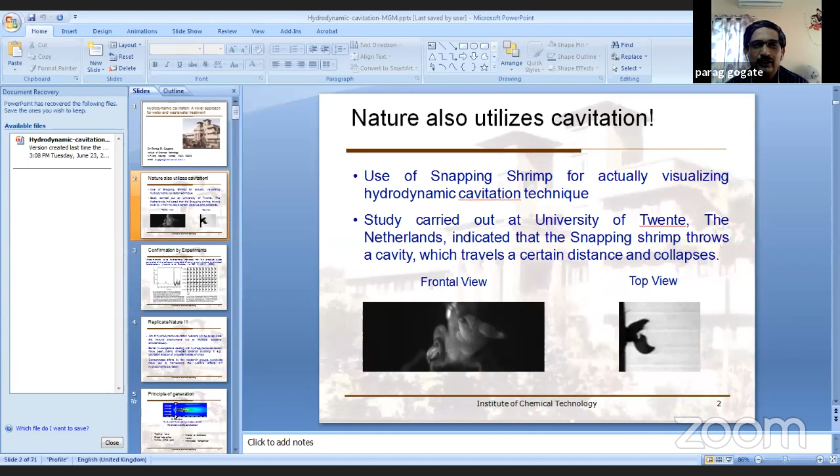Okay, thank you Dr. Kolhe for a bit of a lengthy introduction. I had sent it to you thinking you would print some online brochure or something; for the formal introduction it would have been shorter. But anyway, thanks very much. I would like to thank MGM for inviting me to deliver this lecture as a resource person. What I'll do is turn off the video so it saves some bandwidth for me, and of course the lecture will continue. So today I'm going to talk on hydrodynamic cavitation, a novel approach for water and wastewater treatment.

So when we look at cavitation, it is mostly taken in a negative manner, because what we have heard most of the time is to avoid cavitation, especially in the area of fluid dynamics, because cavitation in pumps, as all of you would understand, is a detrimental phenomenon that leads to erosion and needs to be avoided.

But hydrodynamic cavitation, if you tailor it and focus it towards the application without really affecting the reactor, it can do some wonders.

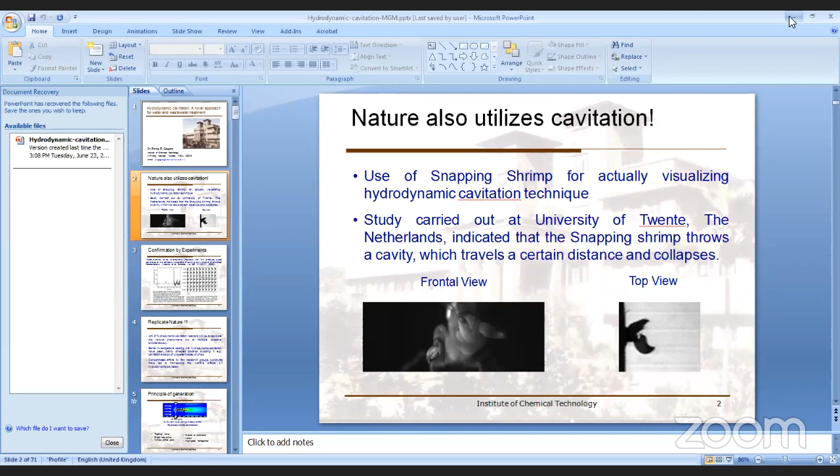Right, so let's continue.

So if you look at nature, that is also utilizing cavitation. This is a very classical old movie, but still it makes a very interesting depiction. This is a snapping shrimp, which was captured in University of Twente, Netherlands.

They are showing that even the snapping shrimp is generating a cavity which travels a certain distance and then collapses. The things would be very clear in the top view. Here you are clearly seeing that something is released, it travels a certain distance and collapses.

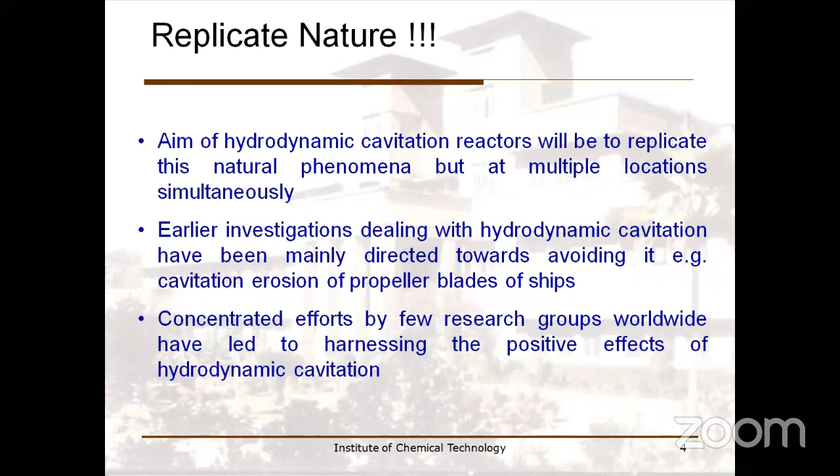Remember, propellers on warships rotate at a significantly higher speed, so that also is going to generate cavitation. And because the cavities were collapsing near the blades, it was also leading to erosion. Concentrated efforts by a few research groups worldwide have now led to harnessing the positive effects of hydrodynamic cavitation.

Let's see how we are going to generate cavitation. So imagine a pipe flow and you have an orifice right at the center. What is going to happen is, because of Bernoulli's principle, once the liquid is passing through the constriction, the velocity is going to go up because the area is significantly reducing.

So once the velocity increases, your pressure is going to go down significantly, and if it falls below the vapor pressure, you will generate a cavity.

These generated cavities are going to travel downstream of the orifice, and then undergo pressure fluctuations. There will be eddies generated, which will drive the different stages of cavitation. So definitely you are going to get significant effects downstream of the orifice, and this relates to whatever cavitation effects you are going to generate.

Now, orifice plate is only one example of the cavitation device. You can also have a throttling valve, or a venturi, which can be either circular or a slit-type venturi, which we describe as non-circular. It can also be a high-speed homogenizer, which will have impellers or stators and rotors rotating at significantly higher speeds.

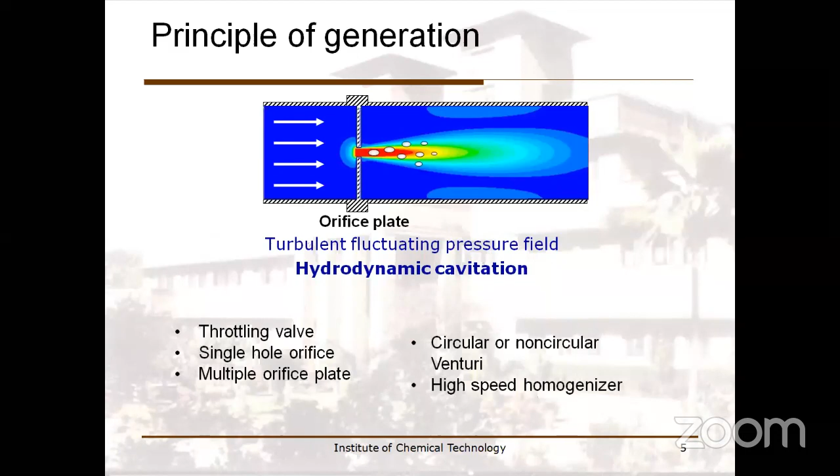And in orifice, you can also have either a single hole orifice, or multiple orifice plates which can be inserted as a cavitation device. So what is going to happen is you will have a cavity being generated in the system, and then it's going to collapse.

So there are three different zones which happen in cavitation effect. One, you are going to generate nuclei, which is going to grow to a certain size, and then it's going to collapse. On the screen, you can see time on x-axis, radius on y-axis, and you can clearly see there are two profiles which are possible.

One we call steady cavitation, second we call transient cavitation. The difference is that in steady cavitation, you get multiple oscillations, and the pressure field generated is lower or of less intensity. Whereas in transient cavitation, you get a significant increase in cavity growth, and then there is a sudden collapse which gives you intense cavitation.

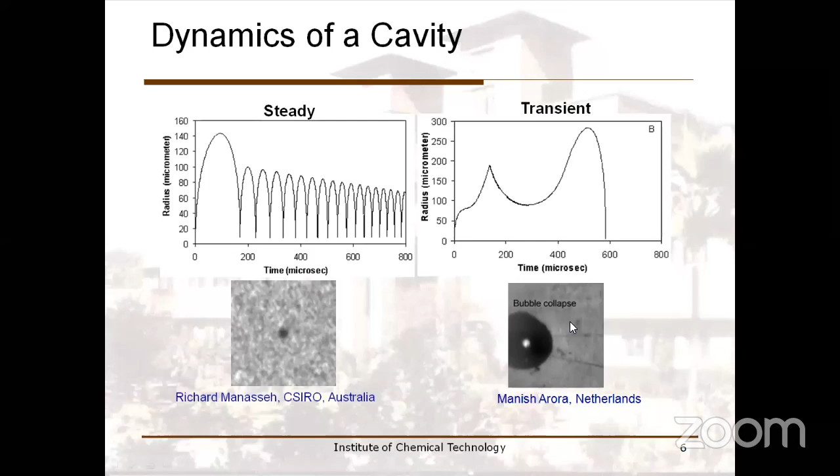People have again visualized this, and these are some videos for your own understanding. You can clearly see this is just a stable type of cavitation, whereas this is transient cavitation, and there is a large liquid circulated around the site of collapse. So the effects are much higher in the case of transient cavitation.

Now, if I want to talk about process intensification, I would look at the key aspects. One is you are going to have localized intense pressure and temperature conditions equivalent to hotspots. Imagine local pressures and temperatures to the tune of a few thousand degrees Celsius and a few hundred or sometimes even a thousand atmosphere pressures. It's not going to be over the entire reactor zone, but over the local microscopic scale.

So your overall reactor, nothing is going to happen, but whatever liquid is exposed to these particular conditions, you are going to get significant effects. And one of the effects would be generation of highly reactive free radicals.

In addition, because things are happening locally, there is also concentrated energy dissipation at the location of transformation. There is also generation of high intensity turbulence, increased transport coefficient, and if you combine everything, you can get an order of magnitude reduction in the energy requirement for physical and chemical transformation.

If you look at the highly reactive free radicals and local hotspots, these are going to intensify chemical processing applications, say reactions or wastewater treatment, whereas high intensity turbulence and increased transport coefficients are going to be significantly useful for reactions limited by mass transfer, or applications which solely depend on physical effects.

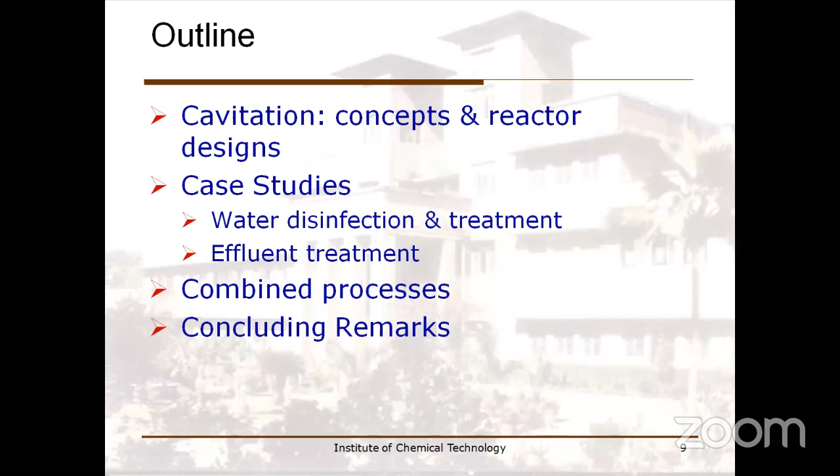So I'm just going to give an outline about the talk. I'm going to talk about cavitation concepts, which we have already seen. Some discussion will be on the possible reactor designs, which is going to be quite simple. We will see some case studies, say from water disinfection or effluent treatment, and we will also see combined processes, and then finally conclude the talk.

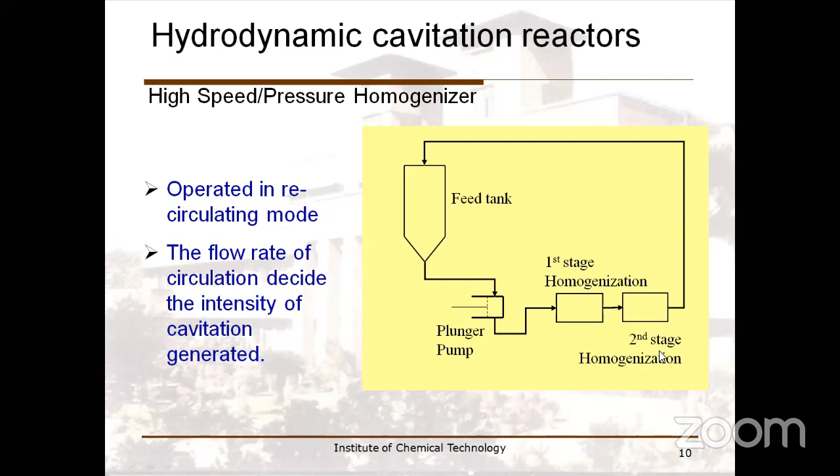This can be, or you combine it with an ultrasonic flow cell. So all variations can indeed be possible.

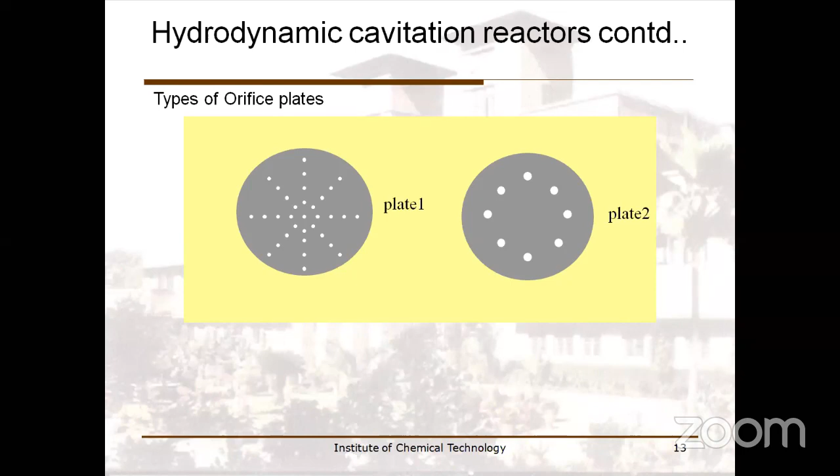So again, there is some depiction in terms of what type of different holes you can use on the plates. And remember, these holes are mostly circular, because it's going to be very easy to drill a circular hole on the plate. But if you can, you can also get triangular or square type holes, because that is going to change your perimeter to cross-sectional area parameters, and this is going to affect your cavitational intensity. So definitely that's going to be very important.

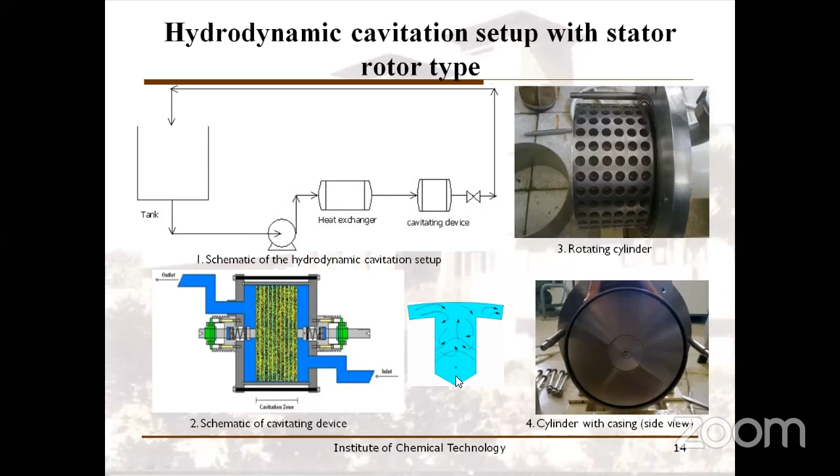So this is a typical stator rotor type assembly, and you can see clearly this rotating cylinder is having multiple holes, which allows you to have a fluid interaction. This schematically shows how you are going to get interactions and then the cavitation phenomena. So again, it's kind of a flow loop.

Now, if you want to understand cavitation in depth, you need to also look at the theoretical aspects, because you need to look at the hydrodynamic cavitation modeling. Now, people don't really want to spend time on modeling, rather spend a lot of intellectual energy on modeling, as compared to that, doing experiments is going to be simpler. But definitely, if you are keen on modeling, you can definitely understand the phenomena fundamentally or in depth.

So I'm going to just present some slides even on modeling. That should not scare some of you, but I'm going to keep it simple, not going to talk about detailed solutions.

Let's try to understand this in simple words. When I look at the bubble dynamics approach, there are two common approaches which are used. One is a simple single cavity approach, and second is a bit complicated cluster approach.

A simile of this single cavity approach and cluster approach lies in sedimentation, which is a simple chemical engineering operation. You must have heard about free settling and hindered settling. In free settling, you have one particle falling in a pool of liquid. In hindered settling, there are too many particles which are going to fall down in a small pool of liquid, so each particle is affecting the motion of other particles.

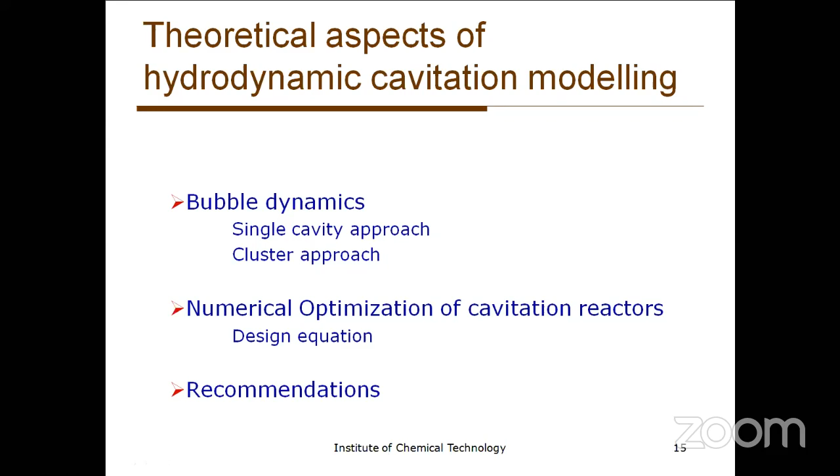Let's see now some theoretical understanding. There is a cavitation number which allows you to predict whether cavitation is going to be possible. It's a simple ratio of pressure drop per unit kinetic energy. Ideally, when the cavitation number is less than 1, cavitation happens.

It can happen sometimes when the cavitation number is greater than 1, particularly if you're having dissolved gases or impurities in the system. But for maximum benefits, one should maintain CV less than 1. Typical range would be around 0.2 to 0.4, or in that range, which will give you maximum benefits.

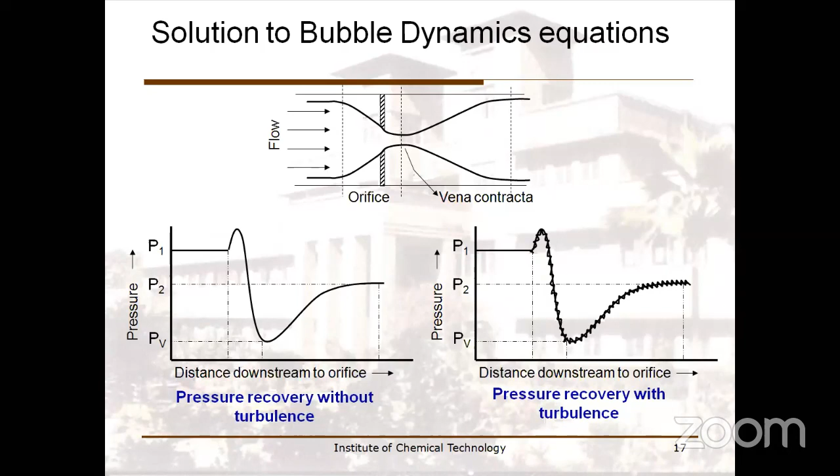For a simple solution to bubble dynamics equations, you will again have flow through the orifice. You know that there will be a vena contracta which will be generated, then there will be pressure recovery without turbulence, and pressure recovery with turbulence. This is very similar to your stable cavitation and transient cavitation.

You have different equations, so I'm not going to go into details. I already shared the presentation, but I'm just highlighting the approach to be followed.

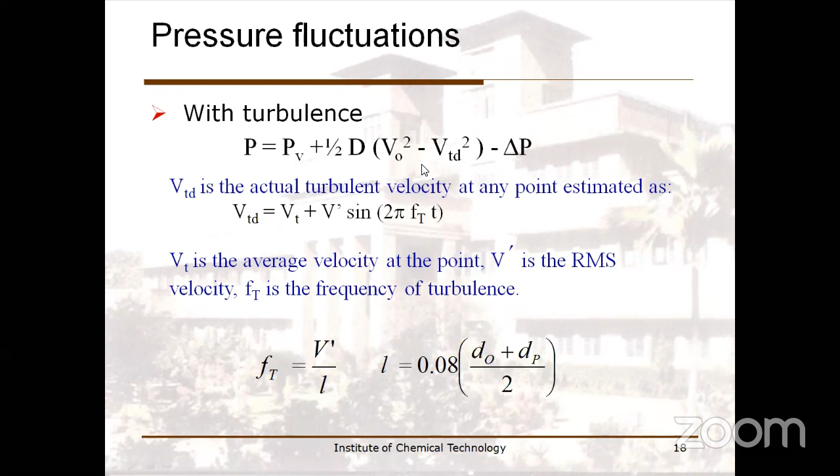With turbulence, you have the sinusoidal frequency of turbulence, which considers your turbulent velocity. And L is the Prandtl length scale of eddy, which is based on your orifice diameter and pipe diameter. So based on the geometry, you calculate the length scale, calculate the frequency of turbulence, and then use it to calculate the turbulent velocity, and then use it in the actual pressure drop equations, which will be used in your bubble dynamics equation.

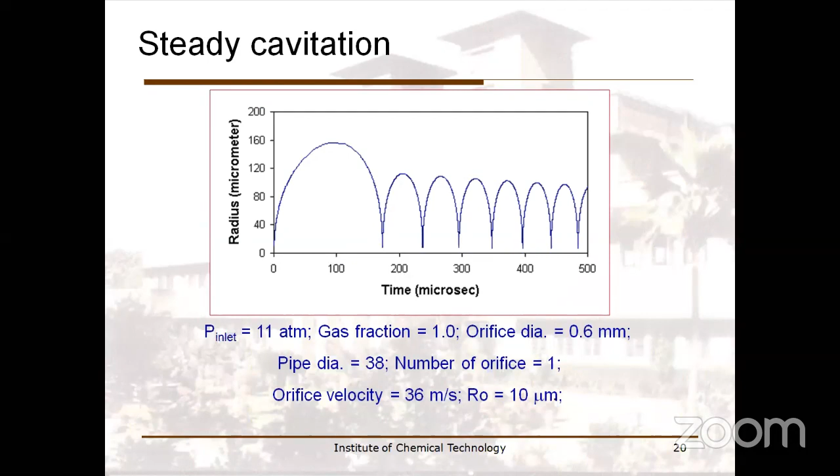Stable cavitation again is similar to what we have seen earlier, there are a lot of fluctuations, and in transient cavitation, you are going to just get a maximum and then significant collapse. The idea of showing these conditions here is that depending on the conditions, you can generate either the steady cavitation or the transient cavitation.

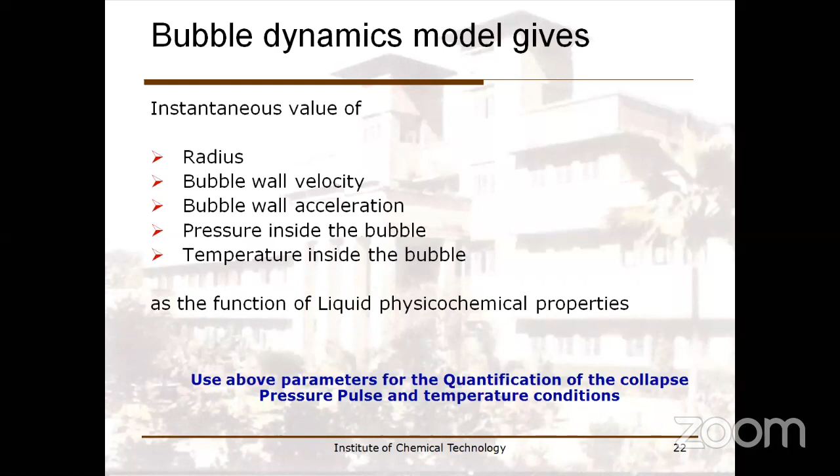A typical bubble dynamic simulation will give you instantaneous values of all these parameters and the liquid physicochemical properties, which can be used for the quantification of collapse pressure pulse and the temperature conditions, which can then be used to relate to your kinetic condition. So let's look at some of the optimum recommendations for the liquid phase physicochemical properties. Liquid vapor pressure, viscosity, and surface tension are the key parameters which are responsible for controlling the intensity of cavitation.

Viscosity in particular, if the viscosity is high, then you might have no cavitation in the system. So the favorable conditions are liquids with low vapor pressure, low viscosity, low surface tension, and the most available fluid satisfying these requirements is water. So definitely there would be many applications of cavitation because water is going to be easily available.

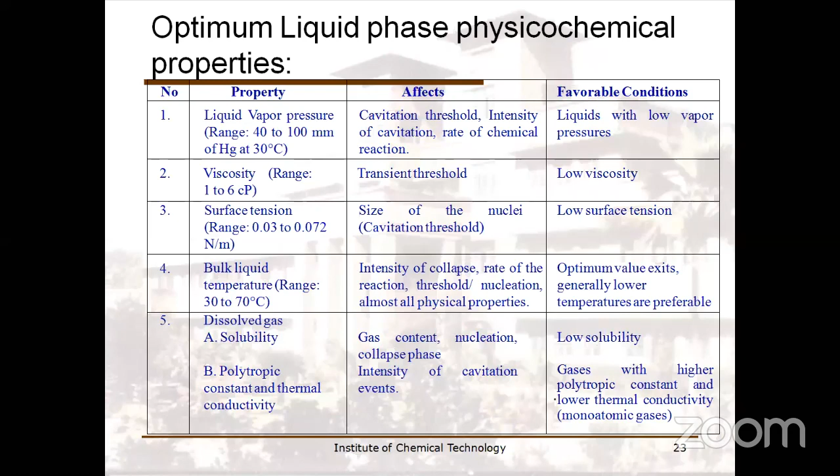In addition, the liquid temperature and presence of dissolved gas solubility or the polytropic constant is also affecting the cavitation, and some of the favorable conditions have been given. We have already seen that cavitation number should be less than 1, but there are some recommendations also given in terms of the inlet pressure.

So if you operate at higher inlet pressure, definitely there will be an intense cavitation. The onset of supercavitation needs to be avoided. So I don't want my CV to go below 0.1, and I can use plates with smaller size of the orifice holes and large in number to get maximum benefits of the shear layer. So that is additional recommendation on the geometry aspect.

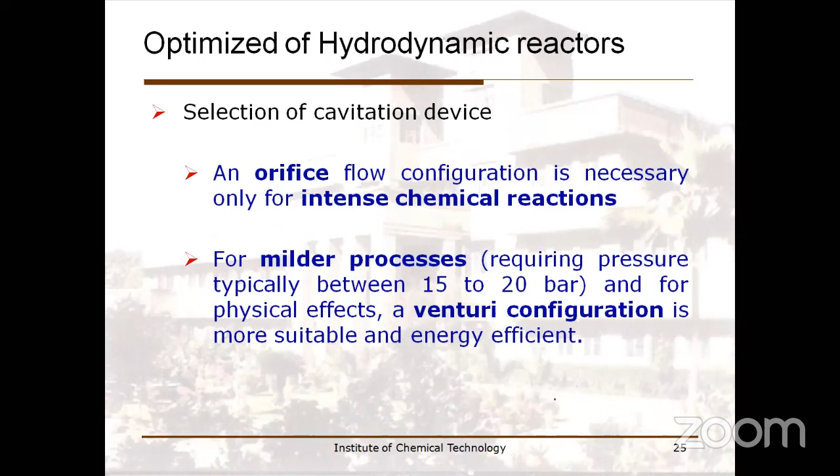Comparing orifice as against venturi: intense flow or intense requirement of cavitational intensity will mean that orifice flow is better. But for milder processes requiring pressure typically between 10 to 15 to 20 bar, and for physical effects, even a venturi configuration will be more suitable and energy efficient, because in a venturi you are going to get lower pressure drop, which means your energy requirement are going to be lower.

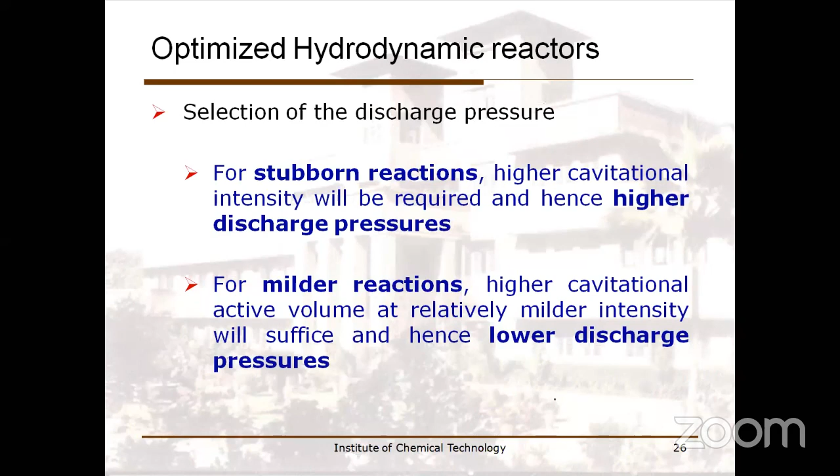Higher cavitational intensity will be required, so mostly you need to use higher discharge pressures. For milder reactions, even lower discharge pressures are sufficient. So if I'm having venturi and I want to increase the cavitational intensity, I can just reduce the length of venturi or reduce the venturi throat to pipe diameter ratio.

In terms of orifice, I can increase the pipe size downstream of the orifice, which offers a faster pressure recovery, or I can increase the number of holes, and I can also decrease the size of the hole. So these are just some of the recommendations which can be used to maximize the cavitational intensity and hence the process intensification benefits which you can get for the reactions.

After looking into the theoretical concepts, we are going to look into some comparison with acoustic cavitation. I'm going to highlight some of the case studies, based on the work done at ICT, comparing acoustic cavitation. Why is this important? Because traditionally, over the last 50, 60 years, acoustic cavitation, which is based on using ultrasound, has been dominantly used. So whenever you are suggesting an alternative, hydrodynamic cavitation is an alternative, you need to compare it with the well-established technique. So let's compare some results with acoustic cavitation.

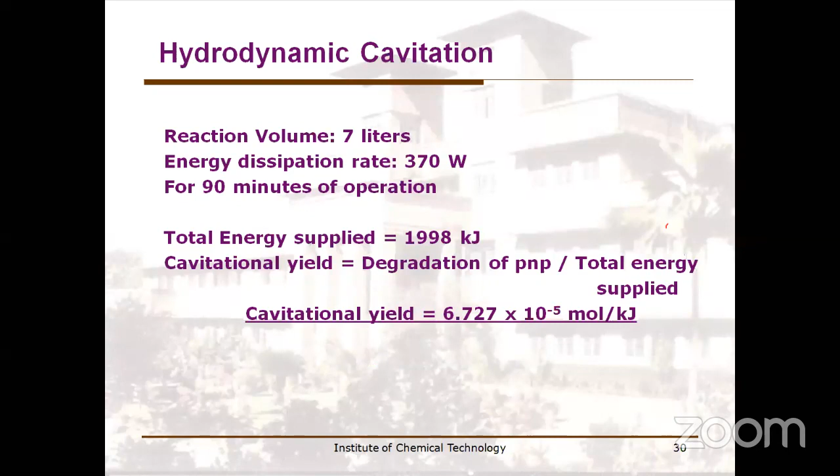Degradation of paranitrophenol: the reaction volume is about 7 liters, energy dissipation rate 370 watts. We use a parameter called cavitational yield so as to quantify the effects per unit energy supplied. In the case of acoustic cavitation, it's usually less, here it is 2.25 into 10 raised to minus 5. The relative numbers are important, so hydrodynamic cavitation gives you 3 times more effects per unit same energy supplied.

If you compare it with the degradation of rhodamine B, which is a pink colored dye effluent - dyes have significant problems because color is the most visible form of pollution. So you need to treat all your dyes, and these dyes are mostly biorefractory, so your conventional biological oxidation may not work in this case, and then you need to look at some alternative treatment schemes.

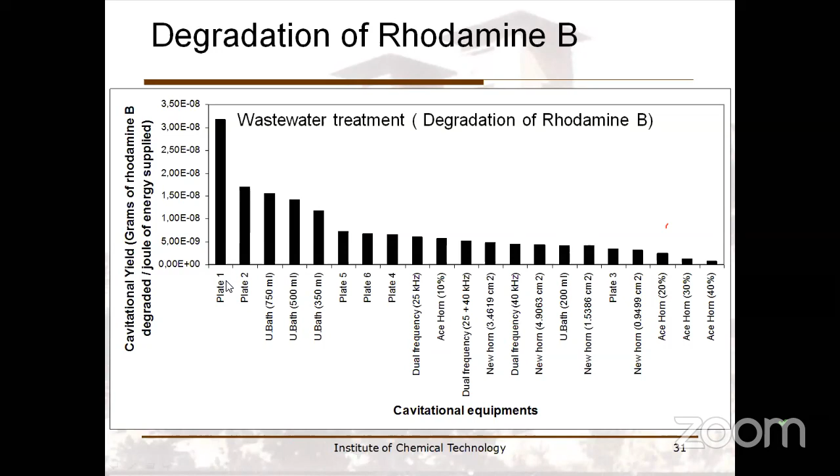So hydrodynamic cavitation, typically plate 1, plate 2, gives you much more beneficial effects as compared to the ACE horn or the horns, which are ultrasonic reactors. And in ultrasonic reactors, if you really want to compare, some multiple frequency units give more energy efficiency as compared to the horn type. Now, the lecture is not about ultrasound reactors, I'm not going to go into details of that. But in essence, hydrodynamic cavitation is more suitable as compared to ultrasonic based reactors.

In a nutshell, if we want to compare scale of operation, definitely hydrodynamic cavitation is easier - acoustic is more suitable for smaller scale or medium scale. Energy efficiency is high for hydrodynamic cavitation, while acoustic cavitation gives lower energy efficiency. Flow-wise, there is already a flow loop. The only disadvantage is sometimes you get low cavitational intensity in the case of hydrodynamic cavitation, whereas acoustic cavitation is significantly higher. So that needs to be taken care of depending on the application.

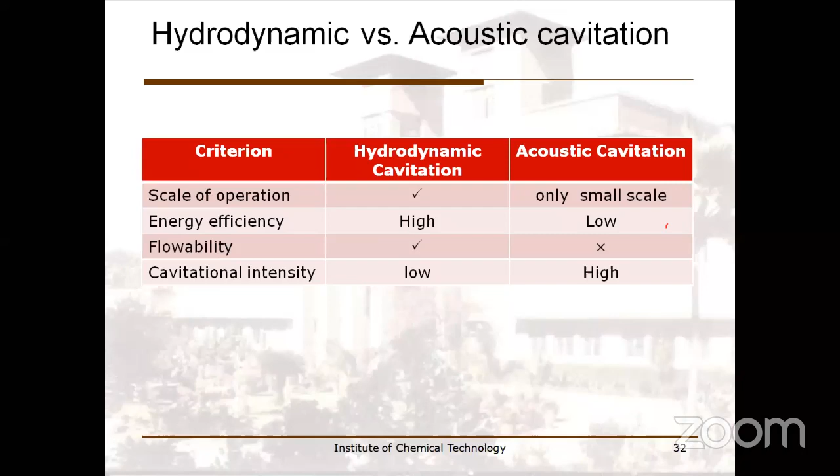So if it is low, we need to look at how I can further synergize the effects. And one of the approaches we are going to see here is combine it with chemical oxidants. So let's see some of the environmental applications.

Water disinfection and treatment. Typically, bore well water also has a lot of microorganisms. So if I want to treat it, can cavitation be used? This is very initial studies which were done, and definitely there was disinfection in terms of the total coliform kill, depending on the operating conditions. With a treatment of 60 minutes, you are able to achieve about 80% killing. So definitely it has disinfection capacity.

It had also shown good application in seawater disinfection, and the kind of commercial application for seawater disinfection would be what is described as ballast water treatment. Whereas for borewell water disinfection, if you can insert a hydrodynamic cavitation device, your cleaning is happening right when the liquid is coming out from the earth's crust. So that treatment is much more efficient—you don't have to post-treat it once you get the water. In the case of seawater disinfection, as I said, the application would be in ballast water.

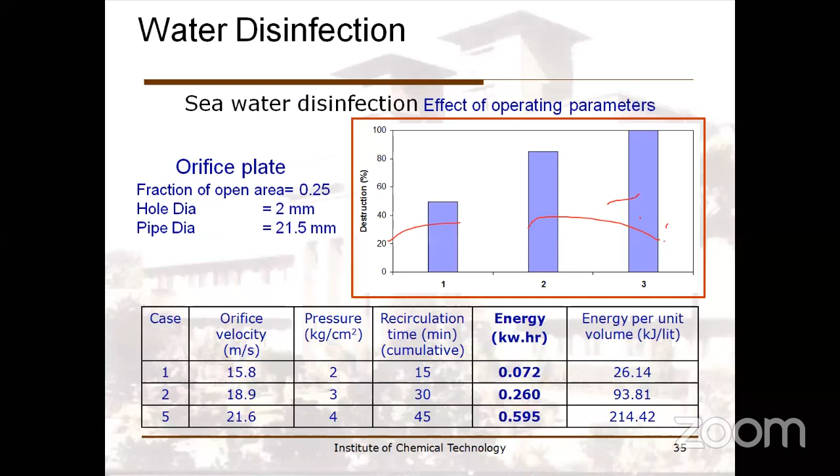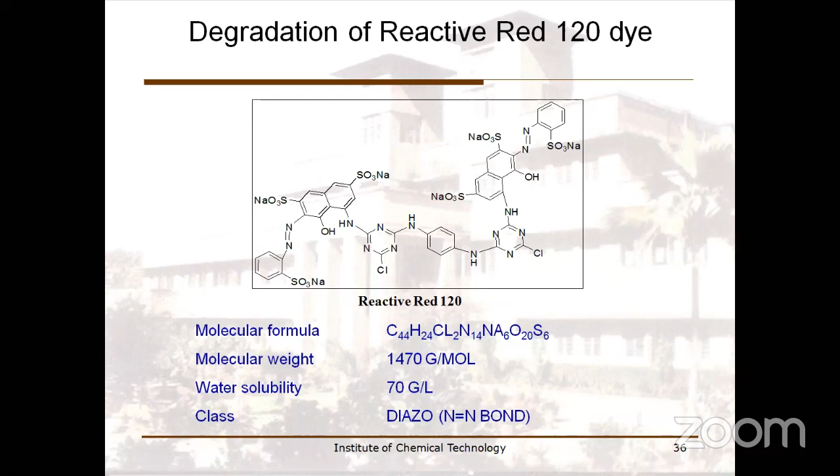There are some more case studies, like degradation of reactive red 120 dye, another dye which is used. As I said, dye is the most visible form of pollution, so we have studied with a lot of dyes. One of the case studies is based on reactive red dye. Here we are going to look into the combination approach.

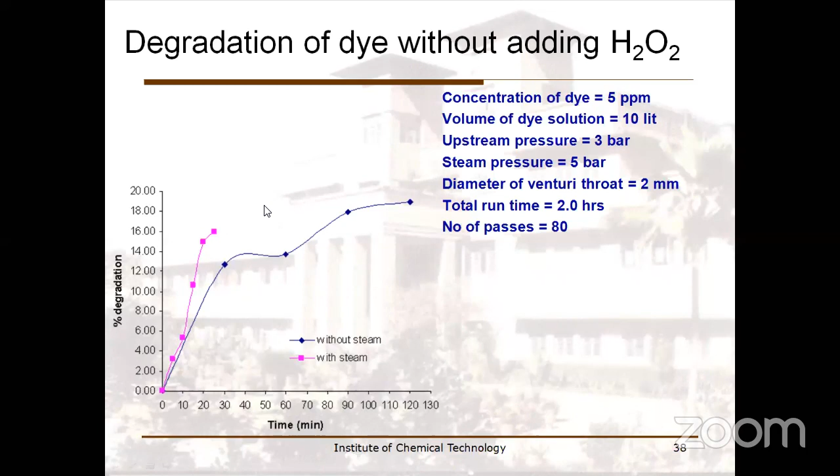About 10-20% degradation is happening without H2O2, only in the presence of hydrodynamic cavitation. With hydrogen peroxide, there is a significant increase and you are reaching almost 90%. Hydrogen peroxide, remember, gives you hydroxyl radicals when combined with hydrodynamic cavitation, and these hydroxyl radicals give you much higher treatment efficiencies. So that is the main governing principle here.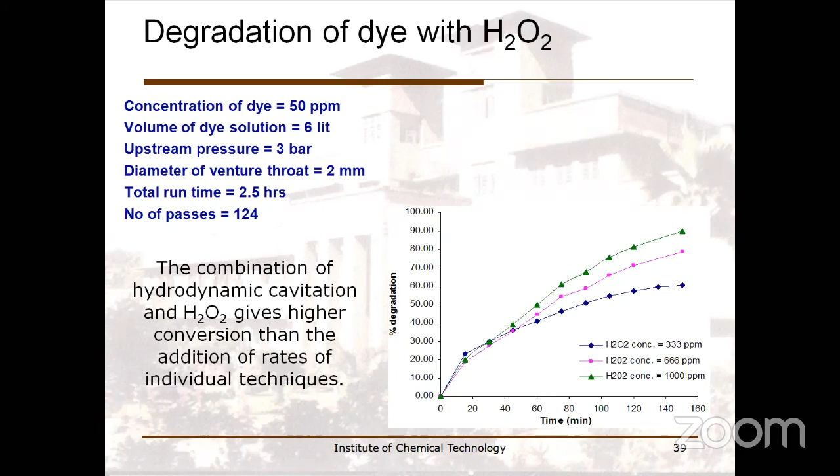One of the applications we have been exploring for so many years now: can we enhance the biodegradability? If you look at industries, most use biological oxidation, and if hydrodynamic cavitation is used as a supplementary, the acceptability is going to be higher. Whenever you put forward a solution to any industry, usually the industry will want an add-on solution—they don't want a replacement type solution—because the capital cost is going to be minimal.

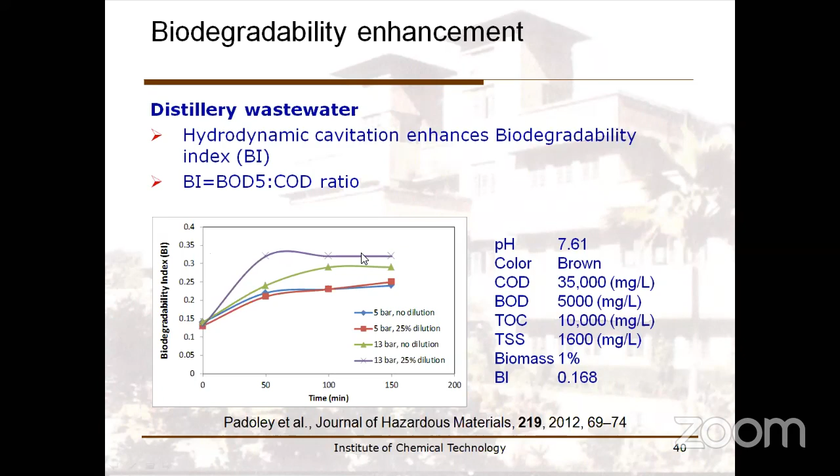So if we can say hydrodynamic cavitation enhances biodegradability, it means it enhances the efficacy of your existing biological oxidation. That's going to be much more recommended and acceptable. A typical range of biological index, or biodegradability index, is 0.3 to 0.5. We started with a kind of refractory effluent having a biodegradability index of 0.1. After treatment, you are reaching the magic figure of around 0.35—within the definite range. So that is an advantage.

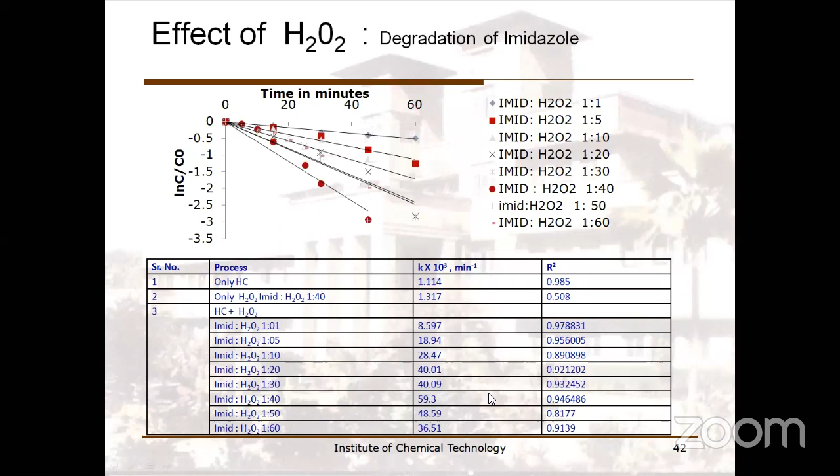You can also use cavitation with Fenton. The mechanism for synergism will be additional oxidation based on formation of complexes, and enhancement in hydroxyl radicals. Here again, some rate constants are given for imidazole degradation, and clearly you can see that hydrodynamic cavitation alone gives much lower values. But combining it increases the rate to about 36, 40, and then in the presence of Fenton, about 244 times—a significant increase in the extent of treatment. You can also combine it with photo-Fenton and get much better results, finally reaching 100% degradation of imidazole.

Now the idea is that combined treatment schemes work better, but we need to also check whether all combinations are useful. If you combine, HC plus Fenton gives you 98% degradation, HC plus photo-Fenton gives you 100%—only about a 2% increase—but you are putting in additional energy in the form of photo, which means UV light.

If it is on the basis of solar, then there is not much of problem, but UV is going to be significantly energy intensive. So I need to look at the benefits and then only decide on which combination I would want to work. This is another combination, hydrodynamic cavitation with advanced Fenton.

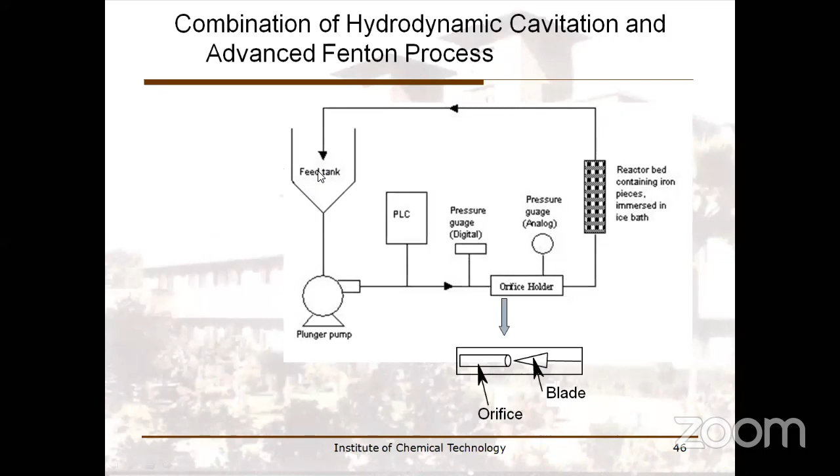So you have an orifice holder, which is your hydrodynamic cavitation part. This part is for advanced Fenton, which is typically iron pieces combined with hydrogen peroxide, added in the feed tank while recirculating, and this can give much higher treatment efficiency. This was tried out for complex effluent, reaching about 40-60% reduction, with residual value about 0.4, and treatment time optimized at 90 minutes.

Now remember, we have already said this is not going to be a replacement technique, so it's going to be an add-on. If I can treat it for say 90 minutes, bring it down to about 0.4, after which your biological oxidation is going to be easier, definitely this is important.

So let's talk about one case study which we have been working on with a US-based company, Ecosphere Technologies. This is a combined reactor, Ozonix, based on combined operation of acoustic cavitation, hydrodynamic cavitation, electrochemistry, and ozone.

Key advantages of this hybrid combination: you will require lower dosage of ozone, which definitely means lower costs of treatment. You will have application for a wide range of effluent because you are generating a number of oxidants in the system.

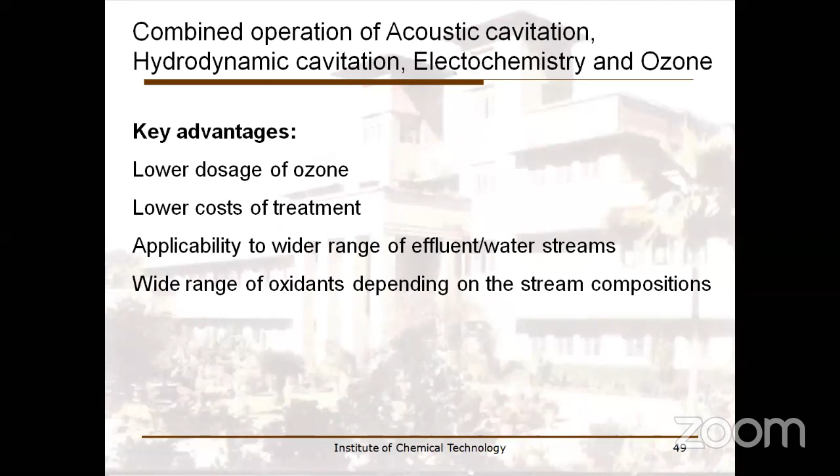Cavitation, when combined with ozone, gives increased mass transfer due to acoustic streaming, the liquid circulation generated by ultrasound. You will have production of enhanced free radicals, and the combination of acoustic and hydrodynamic cavitation also gives enhanced intensity of cavitational collapse.

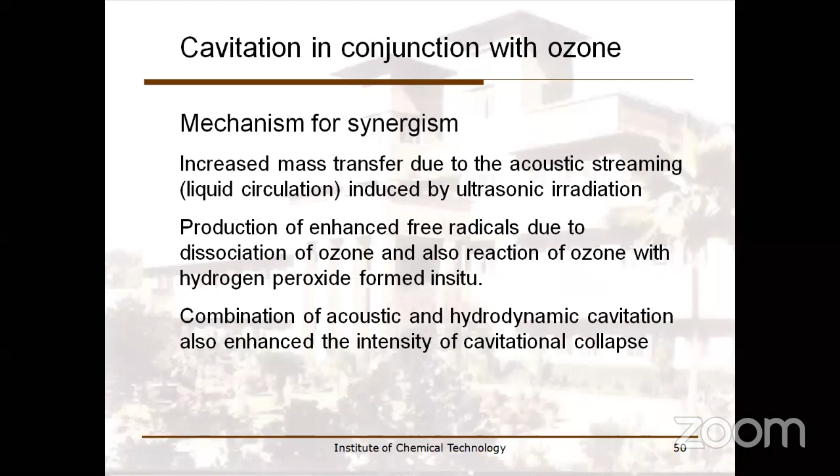Ultrasound also has a component of electrochemical oxidation, or electrochemistry. Again, electrochemistry is limited by mass transfer, so you will have increased mass transfer due to acoustic streaming, giving a better effect, and production of enhanced free radicals due to the combined action of electrochemistry and cavitating conditions.

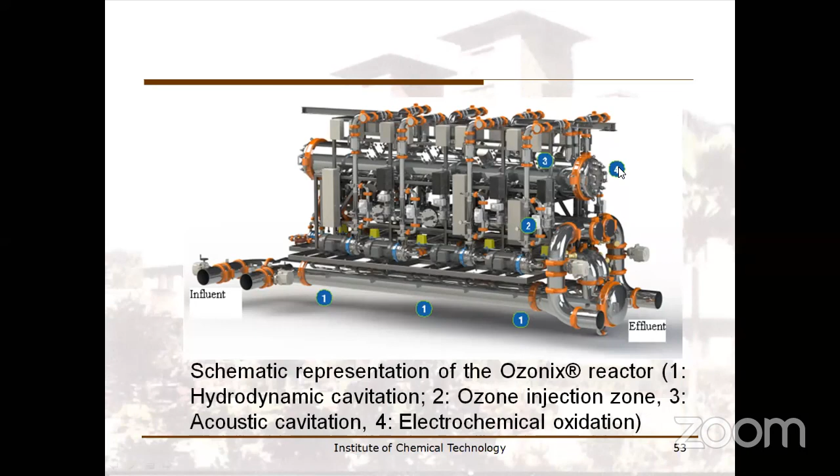This is the actual picture of the Ozonix reactor. This schematic shows the zones: one is hydrodynamic cavitation, based on static mixers. Two is the ozone injection zone, where ozone is introduced. Three are the flow cells, or the ultrasonic transducers, mounted on this pipe. And four is electrochemical oxidation.

The beauty of this is that it is mounted on a self-contained mobile trailer. You must have seen long containers going from one place to another - you have an entire reactor mounted on this mobile trailer, and this gives you on-site treatment.

The main application of this is oil and gas explorations. Each oil and gas well has a limited utility, so I can't have a capital investment there, because once the well dries out, my capital investment just vanishes. I don't want a permanent installation there. So you can get this mobile trailer, treat the water which is going to be used or recirculated, and that's going to be suitable.

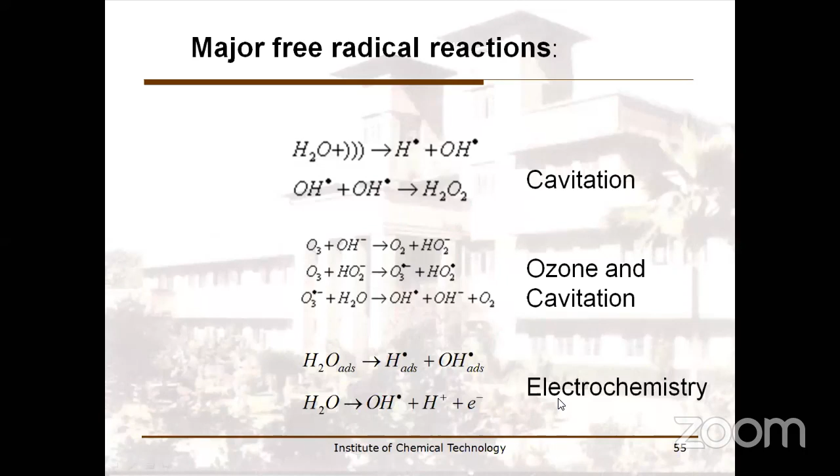Just to give you some science behind the applications: you are generating many radicals. When combining ozone with cavitation and electrochemistry, hydroxyl radicals are generated. Depending on the system, because you may also be treating seawater, brackish water, or water coming from Earth's crust, you will also have some chlorine present, giving oxidizing agents based on chlorine as well, which is again an advantage.

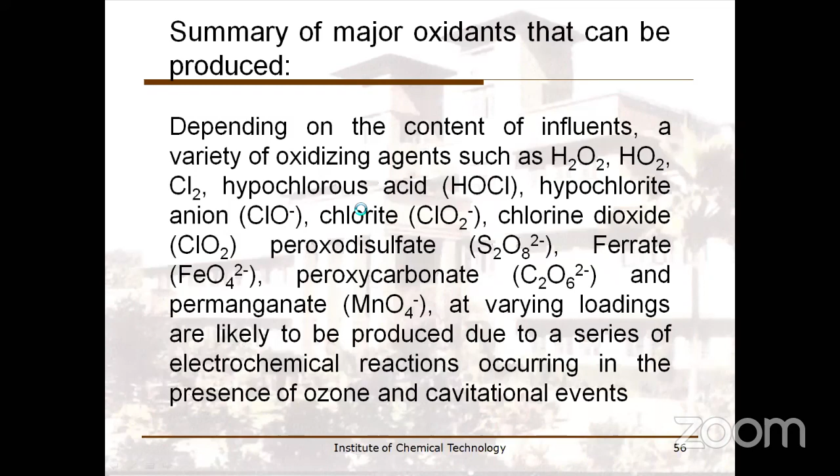Some theoretical simulations were also done to understand the cavitational activity distribution, what levels of turbulence are being generated, and how I can integrate it with chemical reactions, because it is important to predict radical formation and finally arrive at optimum design and operating conditions.

Some theoretical simulations were done based on the basic equation of sound pressure field, which can be solved using CFD and COMSOL. I'm not going into details, but I can integrate it with different radical reactions that are likely to occur and predict radical formation in the system. Results from theoretical simulations show cavitational activity distribution is more or less uniform throughout the device.

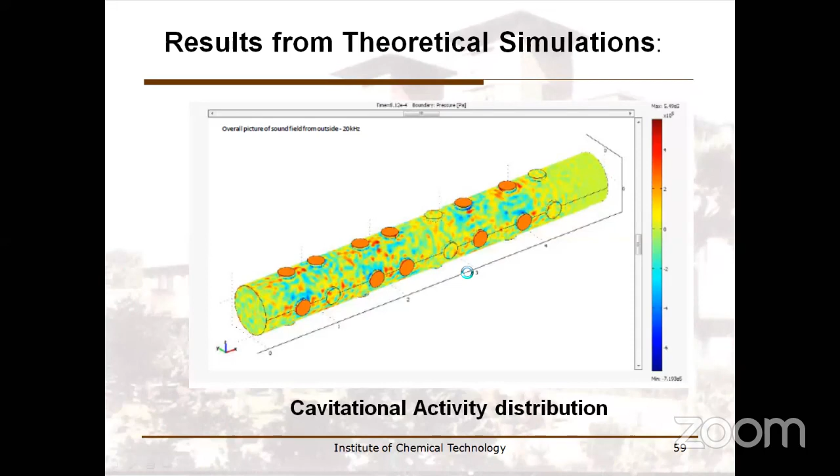So you can see some of these small brown colored circles - these are locations of transducers. There is some high intensity at these transducers, but the overall picture is also showing you some cavitational activity. If you look at the velocity distribution, there are a lot of velocity interactions, so turbulence is generated. This was just to confirm what levels of turbulence and cavitational intensity is occurring.

The potential application sectors of these particular reactors include industrial wastewater treatment, pharmaceutical industries, pesticides, herbicides, and insecticides. A lot of research work has been done based on these model compounds at ICT. It can also be used in distillery wastewater treatment, and in wood finishing industry, because a lot of alcohols are used and this cannot be discharged into effluent, so that can be treated.

You can also use it for microbial disinfection and water treatment. So I can look at a community groundwater supply - I can install hydrodynamic cavitation devices and then get treated water.

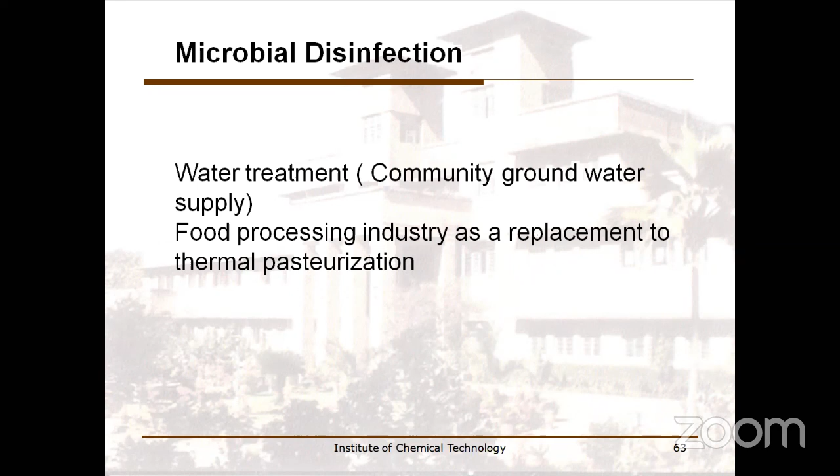It can also be used in food processing industry as a replacement to thermal pasteurization. Your fruit juices are usually amenable to microbial contamination, so thermal pasteurization is used, but the problem is that nutrient quality can go down. If I use hydrodynamic cavitation with a good design, it can serve as a replacement to thermal pasteurization while maintaining the quality of fruit juices. At ICT, we have done experiments with ultrasound-based reactors, but recently some food department people are also working on hydrodynamic cavitation, so that is definitely a possibility.

Ballast water treatment is a major problem in shipping industry. Oceans always have a specific microbial population that I don't want to disturb. This means the water taken by ships at a particular port cannot just be discharged at another port without treatment, because whatever microorganisms are present, if discharged at another place in a different environment, would cause problems. So that needs to be avoided.

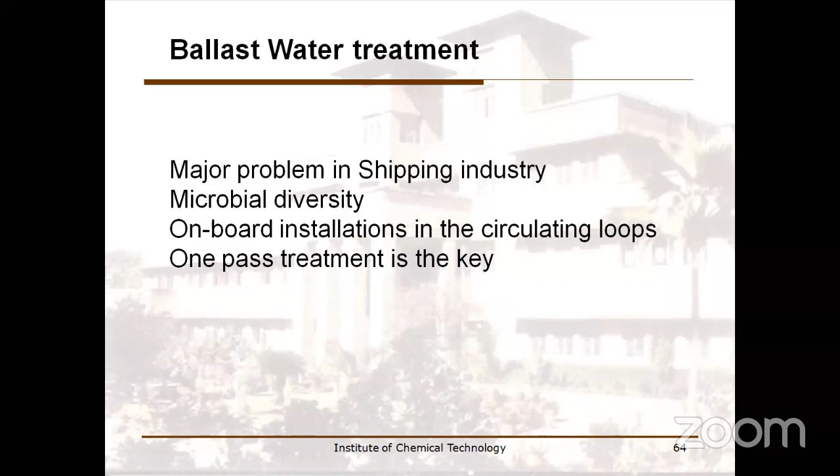So onboard installations are going to be required again in circulating loops. Of course, one pass treatment is the key. So hydrodynamic cavitation does have potential in ballast water treatment.

Industrial cooling waters - there is definitely a possibility. Biofouling is a major problem, and it's a common word people will understand. Even in monsoon season, you will always find some green colored algae or related sticky material depositing on surfaces. Water in industrial cooling towers is continuously recirculated, so if you have such fouling, it will affect the heat transfer in the system.

Chemical biocides are most commonly used, but these offer disadvantages. So I can have hydrodynamic cavitation again in the flow loop, because in industry, cooling water would always flow in a certain loop - from a cooling tower to the main plant, back to the cooling tower. If I use hydrodynamic cavitation here, there would definitely be an application. It can also give benefits of scale and corrosion inhibition.

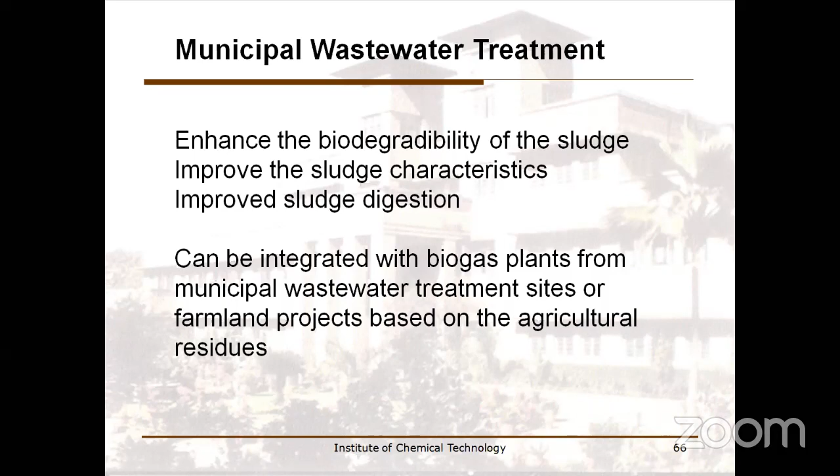It can also have application in the area of municipal wastewater treatment, basically to enhance biodegradability of the sludge, improve sludge digestion, and can be integrated with biogas plants from municipal wastewater treatment sites, or even farmland projects based on agricultural residue. So sustainable biomass conversion to biogas can be intensified based on hydrodynamic cavitation.

So the success stories for the Ozonix reactor were mainly in oil and gas exploration, over 1200 hydraulic fracturing operations, and you have proven applicability at commercial scale.

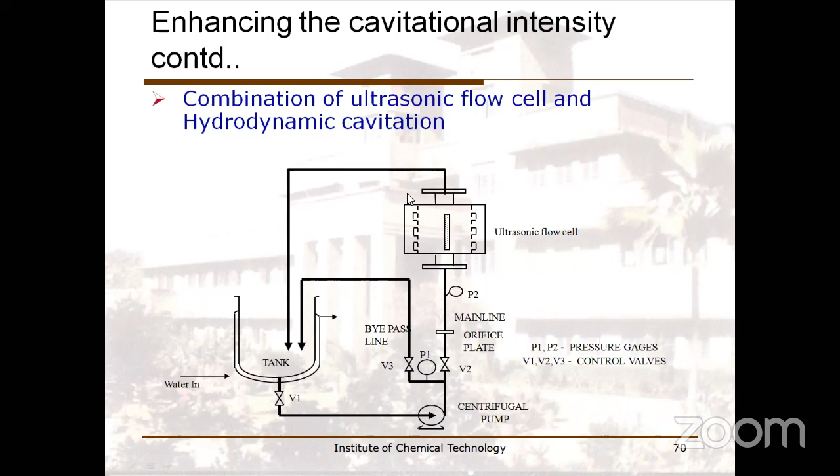Scale up is easier. You have a vast amount of information already available, and the operating efficiency, more importantly, of the circulating pumps, which is the only energy dissipating device in the system, is typically always higher at large scale operation.

So yes, there are a few depictions of use of hydrodynamic cavitation at actual commercial scale for wastewater treatment, industrial wastewater treatment, for cooling towers, for some specific applications in food industry, as I have just said, on food pasteurization. So there are good amount of applications in Italy based on food preservation.

So they are also using a numbering up system, meaning rather than having one big reactor to treat entire processed juice, they're using multiple units, and then the scale up uncertainty is avoided. Numbering up usually allows you to scale up the system without much uncertainty. That numbering up system is what they're using. Wastewater treatment, yes, there are also some commercial applications which are possible.

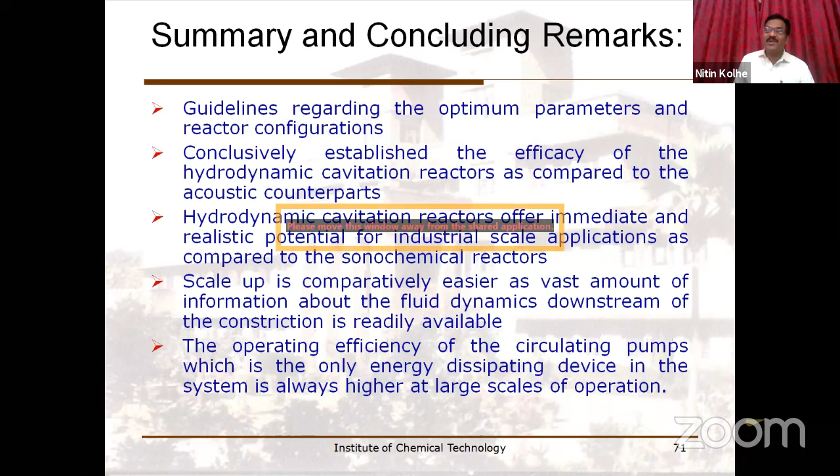Thank you, Dr. Kolhe. As I said right in the beginning, it was good interaction for me also. Definitely, this doesn't replace the personal interaction, and maybe we could have had some snacks after this webinar if it was organized as an in-person event. We will definitely do that when we meet next time. I hope the lockdown is over very soon, and then all the personal interactions are going to continue.

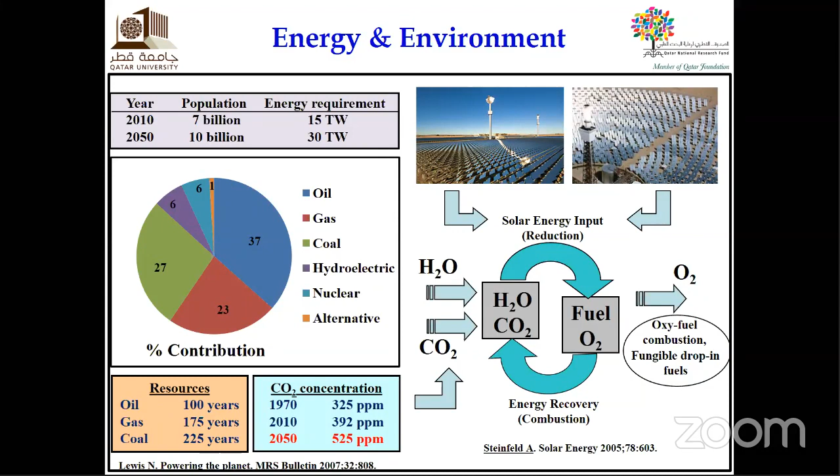What happened in the first step? In the first step, where we have the... where, can you please mute all? Actually, I'm able to hear others' voices.

So then the first step, which is a thermal reduction step, we use solar thermal energy to reduce the metal oxide. Reduce means we are taking the oxygen away from the metal oxide. So the reduced metal oxide will be reacted with water and CO2 to produce syngas. If you use steam, then it will only go for the hydrogen. So this is the overall reaction chemistry.

Basically, the metal oxide is not used up in the process. It is recycled and used multiple times, so it can behave as a semi-catalytic material. Overall, the reaction chemistry is: metal oxide driven by solar thermal energy becomes reduced metal oxide, and the reduced metal oxide reacts with water and CO2 to produce syngas. The net reaction, because the metal oxide is not consumed, is that solar thermal energy splits the water and CO2 to make the syngas or hydrogen.

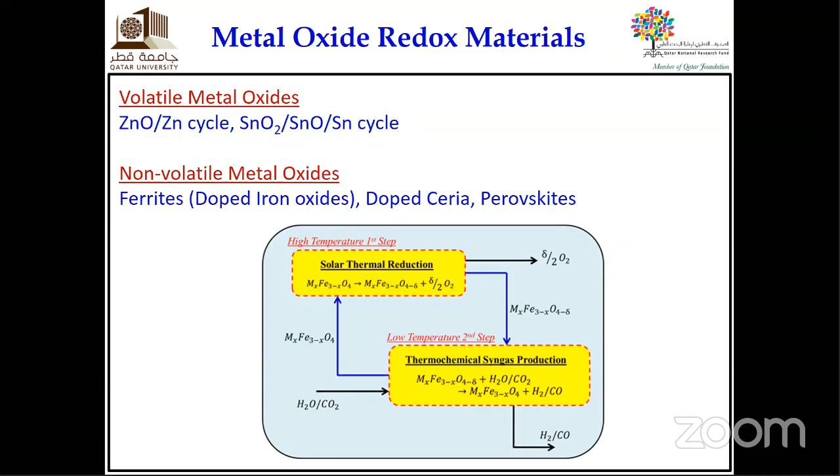First one is the metal oxide synthesis. Here we are synthesizing the metal oxide by different methods. We are not purchasing any metal oxide from any company because we are playing with the chemistry. We are trying to develop different kinds of metal oxides in our lab using different methods.

Then we are doing the kinetics and economics analysis. We are not doing that much in that area, but we just started.

Number 4 is solar reactor efficiency analysis, which is our expertise. What we are doing is we split this part into 2. In the first part, from the literature we generate the thermodynamic data, and we utilize that data to see how much solar energy is required for the reactor and other process arrangements, and also the solar reactor efficiency of the process. Each metal oxide has a different efficiency.

In the second part, instead of doing theoretical work, we actually utilize our own experimental data to model the reactor arrangement, and then we try to find out the efficiency of the process. Number 5 and number 6, we don't have the complete facility here in Qatar, so we are collaborating with Switzerland and USA universities for the solar reactor design and development and pilot scale solar experiments. I will show you at the end of the presentation what we are actually trying to do.

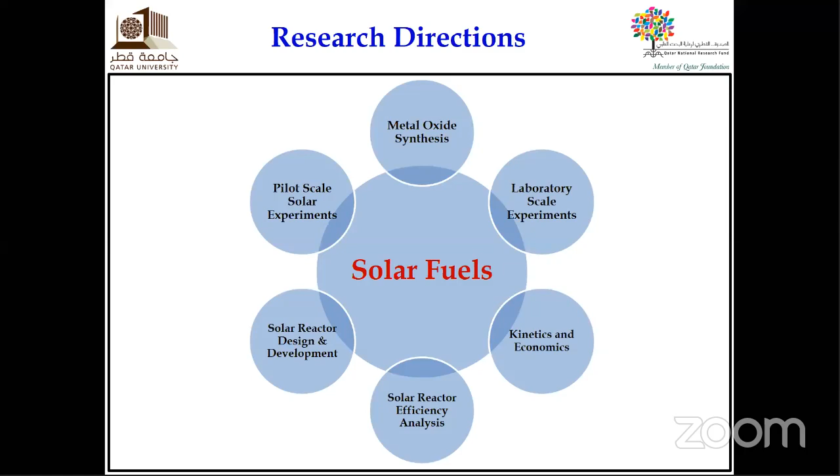So today I'm going to talk mainly about the first 2 boxes, the metal oxide synthesis and the laboratory scale experiments, because that's the initial step. And the materials which we identify from this step, we take to the next level for the solar reactor design and solar reactor experiments.

So let's start first with ferrite materials. Let me explain what is ferrite material. Ferrite means we know iron oxide. We dope the iron oxide with different metal cations. For example, we dope iron oxide with nickel, so it becomes nickel ferrite. If you dope ferrite with cobalt, it becomes cobalt ferrite. So this is called ferrite materials.

So what we decided is why not test these, because this was done only for hydrogen production, but for the production of syngas we need carbon monoxide also. So we decided to test the nickel ferrite and cobalt ferrite materials for solar thermochemical CO2 splitting, from which we get the CO. So the first step we did is synthesis of the ferrites.

We use the sol gel method. If you need some information, you can check the paper - I gave you the link below. The sol gel method is helpful for producing nanocrystals.

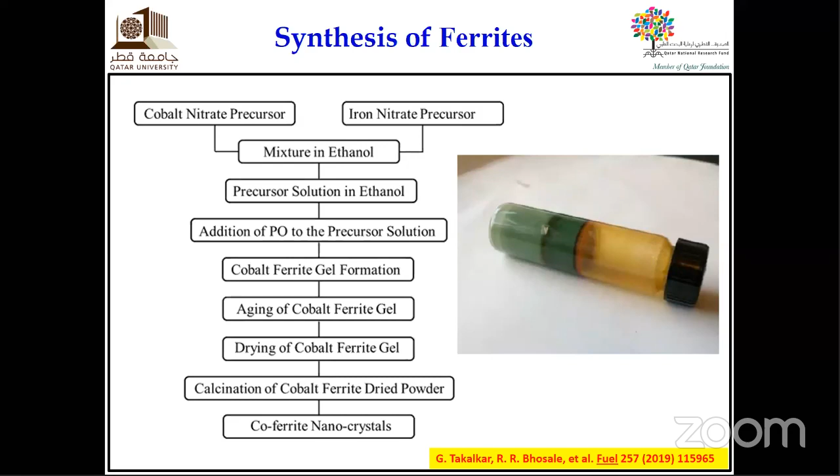So this is the sol gel method. This is one of the methods we are using. I will show you later what other methods we can use to develop different materials.

Then after synthesizing, the next step we did is characterization of ferrites. We use X-ray diffraction to find out the phase composition. We used BET surface area analyzer to find out the surface area and the porosity of the material. We use the scanning electron microscope to find out the material morphology, and the TEM helps us find out if we are able to generate the nanomaterials or not.

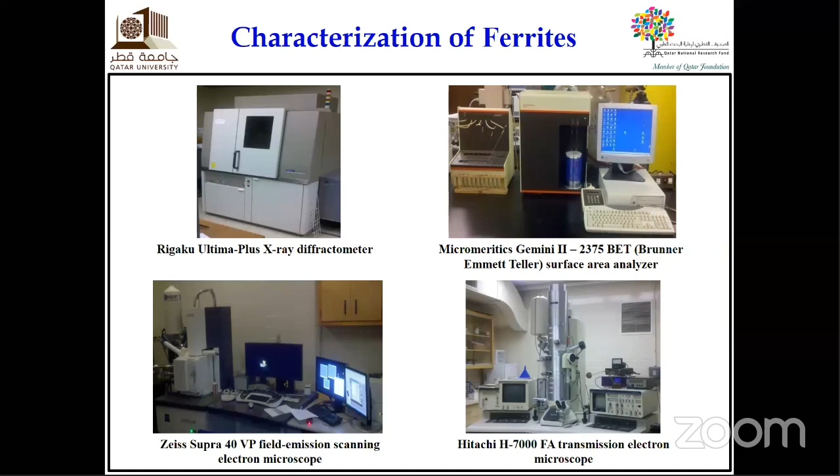So what we're doing here, we are actually replacing the iron part, which is less reducible or less active, with the nickel part, which is more active. So we synthesized 6 nickel ferrites with different morphologies and different crystal structures, and similarly we have the cobalt ferrite. So the XRD tells us that yes, whatever we planned, we synthesized successfully.

In addition to XRD, we did the EDS analysis also, which helps us further confirm the elements involved and what percentages. So these are the nickel ferrite and cobalt ferrite we synthesized. After that, we also did the BET surface area analysis, and because it was calcined at 1000 degrees Celsius, the surface area was around 10 to 15 meters square per gram.

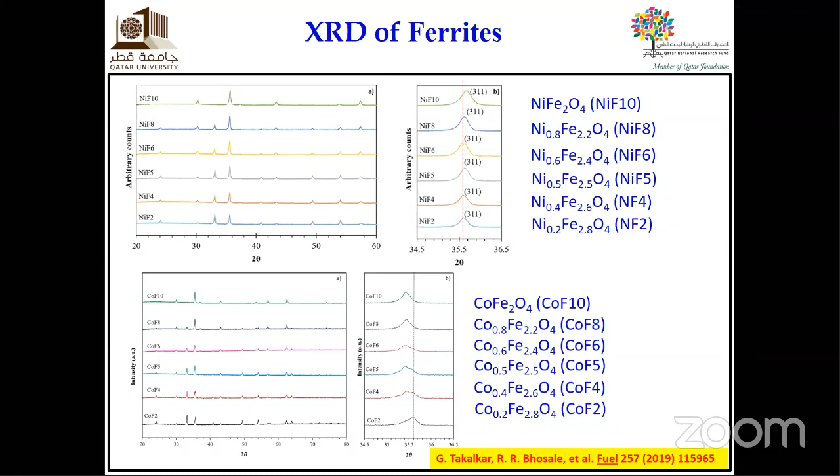So after doing this, the material is done now. We synthesized nickel ferrite and cobalt ferrite as we wanted. Now the next step is to test them.

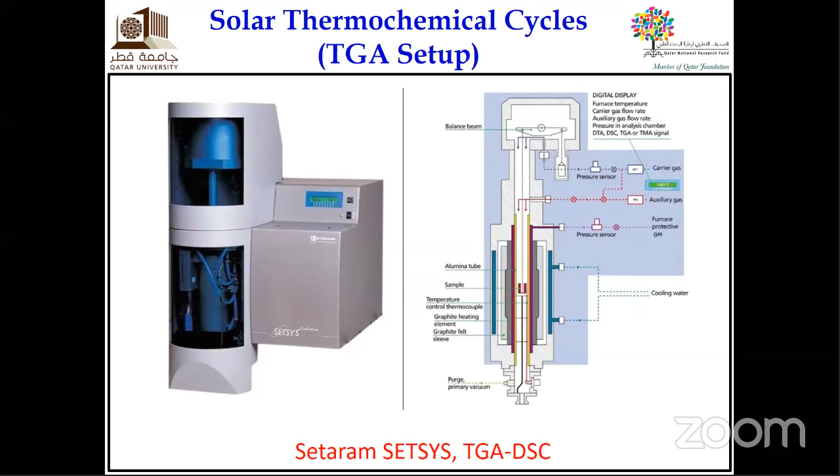We connected this TGA setup to our entire reactor arrangement. For example, we have the gas supply coming in, protective argon gas is used, which avoids the graphite furnace from getting worse. We use argon carrier gas as the inert sweep gas during the reduction step, and then we use 50% CO2, 50% argon gas during the oxidation step.

This TGA setup is connected to gas analyzers, so whatever gases come out from the setup went to the gas analyzers. In addition to the weight change, we also found out how much CO is produced and how much hydrogen is produced, for example in steam generation or steam splitting, by using the gas analyzers.

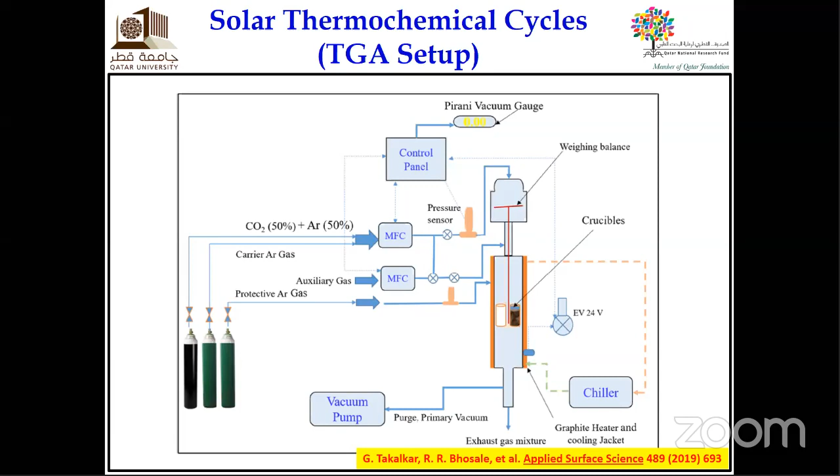We put about 75 to 100 milligrams of sample mass for each experiment. What happens is that once you heat the temperature up to 1400 degrees Celsius, the weight decreases because the oxygen comes out.

When we reduce the temperature, at 1000 degrees Celsius, we switch the gases from argon to CO2. Because of the CO2, the material will take the oxygen again from the CO2 and the weight will increase. So decrease in weight means the material is reduced and oxygen comes out, and increase in weight means oxygen is picked up by the material and the CO2 is split into CO and O2, and water can similarly be split into hydrogen and oxygen.

We also have a gas analyzer at the outlet so we can check the gases. This way we did multiple cycles, using the same metal oxide multiple times, because the metal oxide has the property that allows us to use the same catalyst for multiple cycles.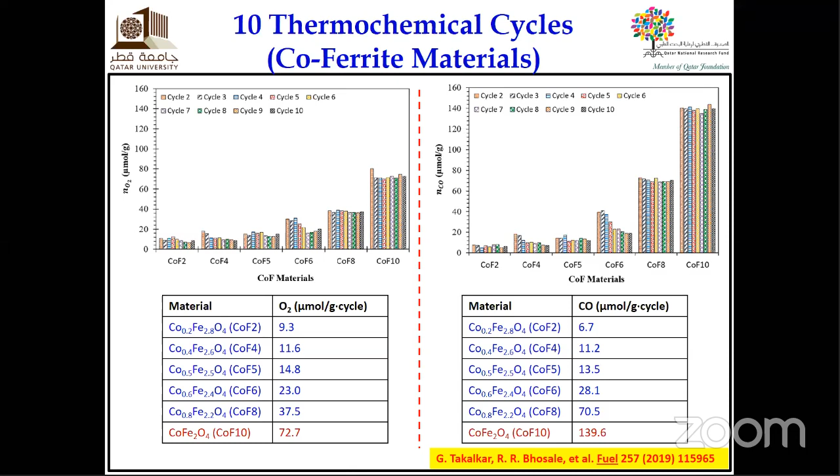A similar thing was observed for cobalt ferrite, that CoFe2O4 is capable of producing the highest amount. Comparing cobalt ferrite with nickel ferrite, they're almost identical, with only a slight difference, maybe due to experimental error, or maybe cobalt ferrite is slightly better. So this is what we observed in this case.

After doing this, one more thing came to mind: why don't we check the phase stability? Since we're doing multiple cycles, we weren't sure - we assumed the cobalt ferrite crystal structure remains the same, but we should check what actually happens. So we checked the phase stability of the nickel ferrite and cobalt ferrite as well.

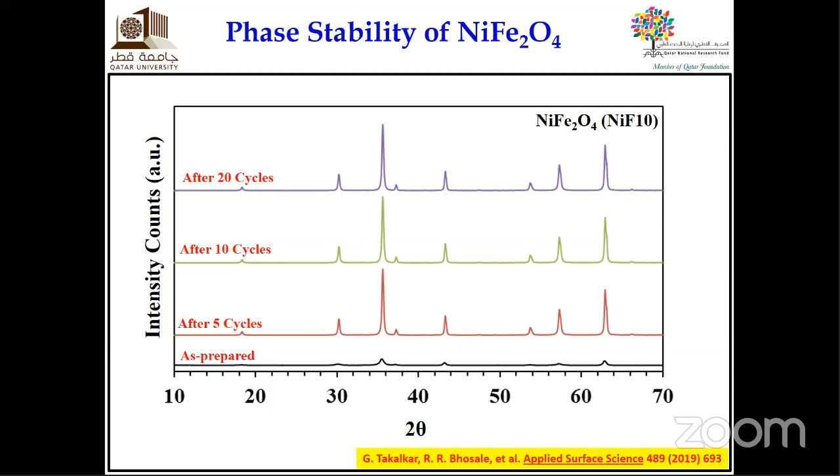We also did the EDS analysis to confirm, and this indicates that the nickel ferrite crystal structure remains intact. It doesn't go into any other crystal structure, or break down like nickel and iron oxide. So we can say that whatever amount of fuel we have seen in the previous slide is because of the NiFe2O4 crystal structure. A similar thing was recorded in the case of cobalt ferrite, which also remains quite stable, and we can claim that whatever fuel production we have seen is because of the CoFe2O4.

After doing this, that's what we have done so far in the case of ferrites. Then we move towards dope ceria. Now in the case of ceria, what happens? Ceria is a crystal structure of CeO2. So what we will do in ceria is again the same thing: we will try to dope the ceria crystal structure with different metal cations, from transition metals, from lanthanides, from alkali and alkaline earth metals, in all these cases. It is expected that doping these metal cations into the ceria crystal structure reduces the partial molar enthalpy, which helps to reduce the material faster and at a lower temperature.

So we did three actual different studies. The first study, we doped the ceria material with transition metal cations like nickel, zinc, manganese, iron, copper, chromium, zirconium. You can see this. Here we used the co-precipitation of hydroxide method, because in previous investigations people have used the same method, so just to compare with other people, we did this. This is the picture; if you need more information, you can check the paper given below. Again the same thing is done, we did the XRD check and also the EDS check to find out if we synthesized the same material or not.

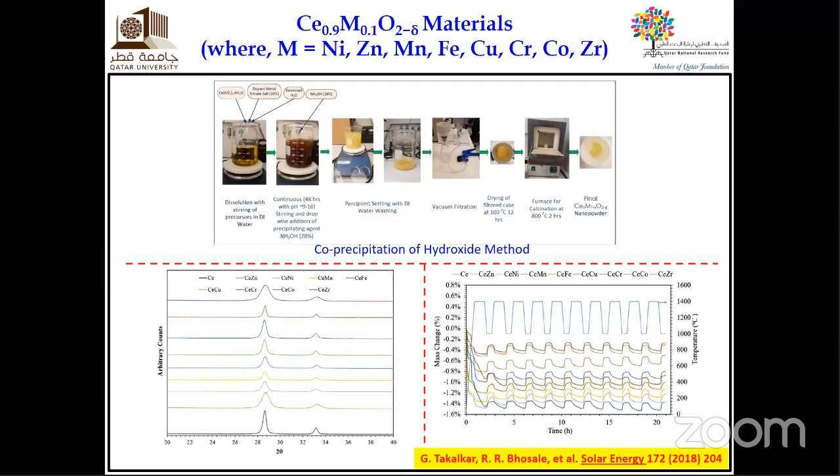And the right-hand side picture is actually the TG plots of each material, the 10 TG plots. The experiments were done continuously, around 22 hours of experiments were done. And this TG plot was used to find out the actual amount of CO and O2 production capacity of each ceria material. These are the numbers.

Here I put the ceria in black, because we are comparing what will happen when we dope the ceria with transition metal cations. So ceria is in black. The red color means that the dopant actually improves the O2 production capacity or CO production capacity, and blue means it doesn't have much effect. So if you check the first part, the O2 production capacity or thermal reduction capacity, zinc, iron, and chromium actually help improve the O2 release capacity of ceria, while nickel, manganese, copper, cobalt, and zirconium are not that beneficial. On the other hand, if you look at the CO production capacity, only zinc and iron are capable of helping ceria produce more CO compared to actual ceria, while other metal oxides produce a lower amount of CO.

So from this study, we identified that zinc, iron, and chromium are suitable for the next study. So instead of testing all the materials again, we can focus on zinc, iron, and chromium only.

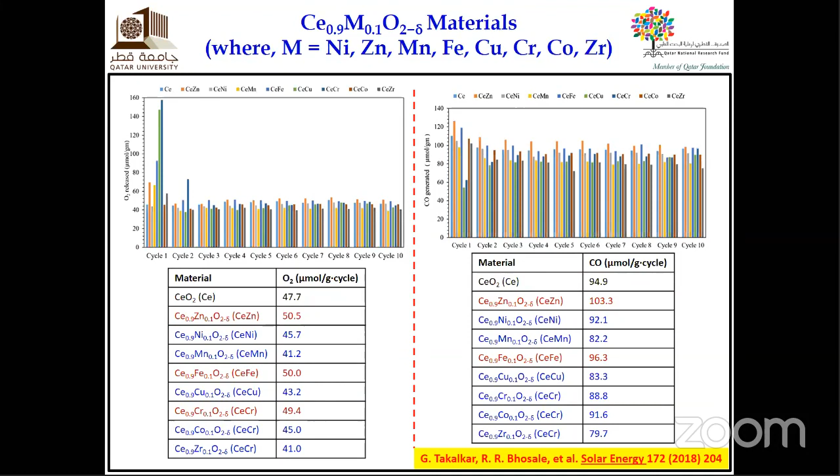The second study we did is we doped with lanthanides. Lanthanides means we have lanthanum, praseodymium, samarium, neodymium, gadolinium, terbium, and other lanthanides. The same approach was applied; we used the co-precipitation of hydroxide method, so we can compare our own materials together. XRD is done, and again these are the TG plots for all the materials.

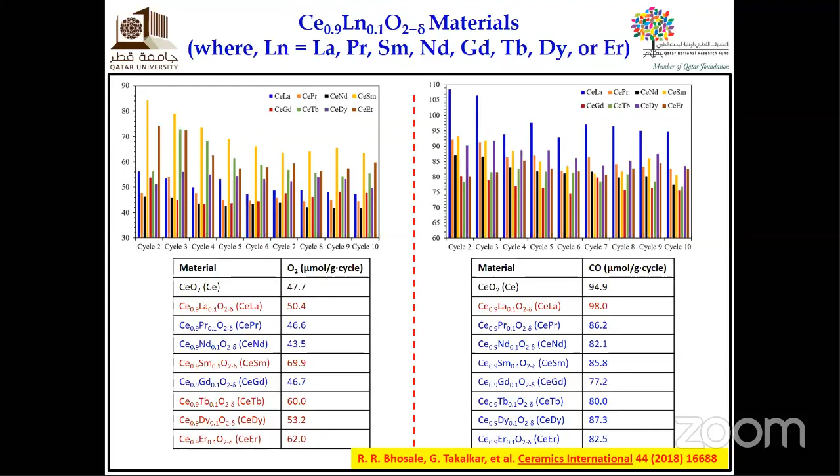Now here things are quite interesting. If you check the O2 production capacity, almost 5 out of 8 dopants successfully helped ceria improve the O2 production capacity. For example, lanthanum, samarium, terbium, dysprosium, and erbium help improve the thermal reduction capacity of ceria. But when it comes to the CO production capacity, only lanthanum is beneficial. So based on this study, we found out that if we want to improve the O2 production capacity we have 5 options from lanthanides, but if we want to improve the CO production capacity, we have only 1 option from lanthanides which is helpful.

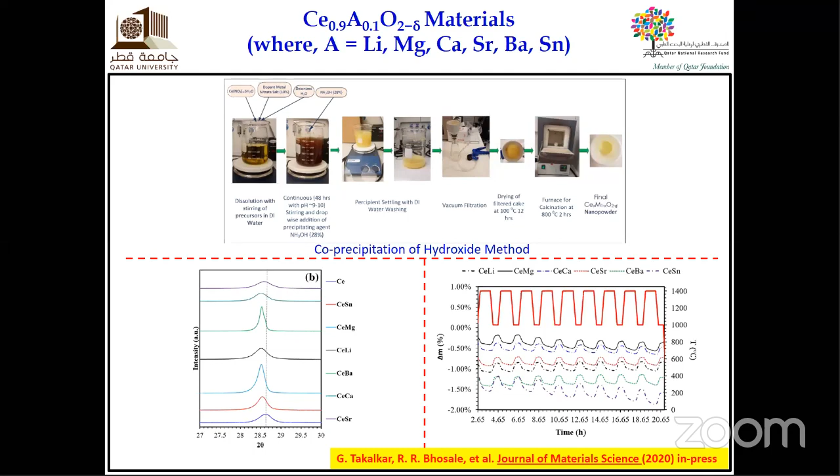The third study we did is with the remaining elements, for example lithium, magnesium, calcium, strontium, barium, and tin from different sections. Here again the same approach was applied because we want to compare them together. The thermal reduction was carried out at 1400 degrees Celsius and the splitting was carried out at 1000 degrees Celsius. Here things are more interesting, because all the dopants successfully helped ceria improve both the thermal reduction capacity and the CO production capacity.

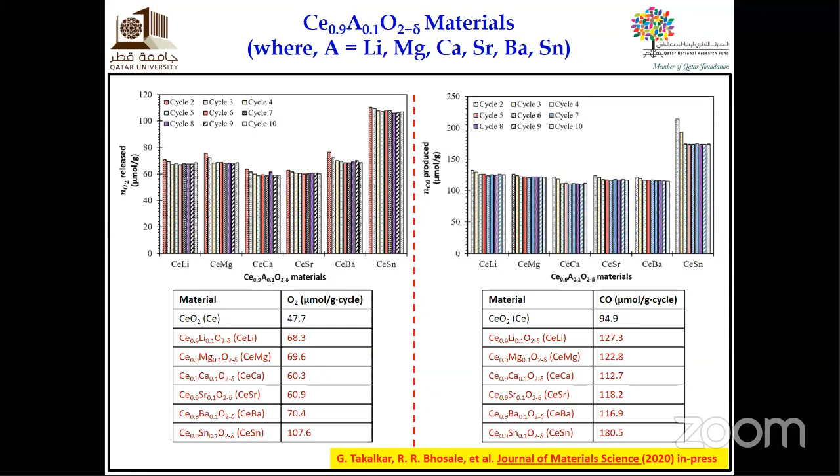Especially if you check the tin dopant, it has the highest amount of O2 released and CO produced as compared to all the dopants we have used until now: transition metals, lanthanides, and this. Based on this, we identified that we are taking this to the next level to find out which materials will behave better in the pilot scale reactor, which I will show later.

This is the initial study we did for ceria. Similarly, for the perovskite material, perovskite is recently explored in this solar thermochemical research, around 7 to 8 years. Before that, only ceria and the ferrites and others were used. So we decided to do the perovskite analysis by preparing as much perovskite as we can. We did La-based perovskite, LaSrMnO3, NdSrMnO3, samarium SrMnO3.

These dopants are selected based on their ability, their theoretical ability, and also previous analysis. Here we use a different method, solution combustion synthesis approach. I'd like to clarify that we can develop all these materials by all the methods, but I'm specifying this specific method because others have used it, so we can compare with that. If you use a different method, people can claim you used a different method, so we cannot compare. We have to compare apples with apples, not apples with bananas. So we did the solution combustion synthesis approach.

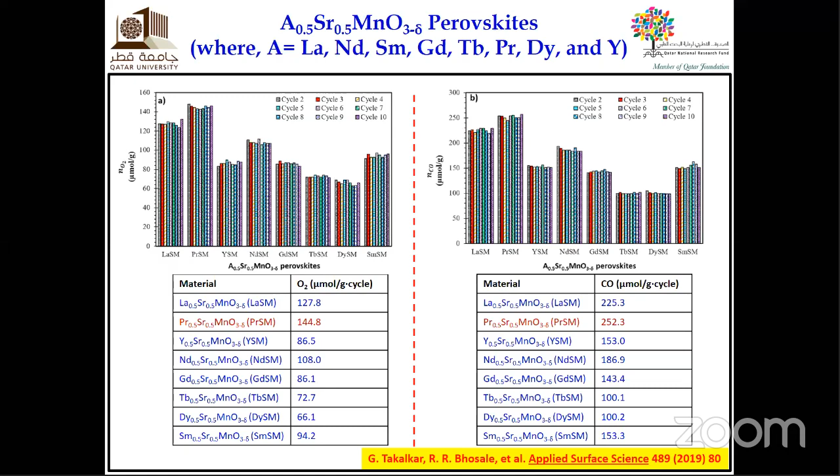In our next study, we studied PrSrMnO3 further. Basically, we played with the X here: we moved the concentration of Pr from 0.1 to 0.9, and similarly the strontium concentration was moved from 0.9 to 0.1. This is the material chemistry approach. So we developed around 9 PSM perovskites to find out which one is best, because in the previous study we found Pr.5 Sr.5 was the best, but we didn't know if 0.1 and 0.8 had a different role to play.

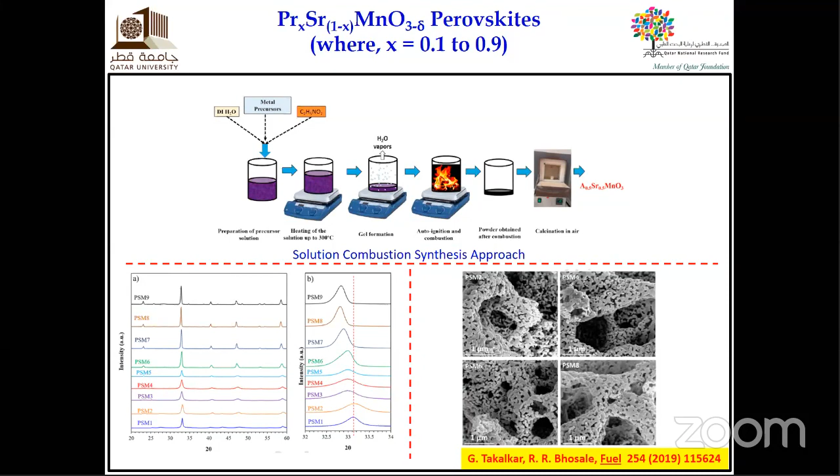When we compare, we found that in terms of thermal reduction capacity, Pr.3 Sr.7 is more beneficial, because it produces the highest amount of O2. In terms of CO production capacity, Pr.2 Sr.8 is the highly efficient one. Even Pr.3 Sr.7 is almost like number 2 in this case. So from this study, we can conclude that Pr.2 and Pr.3 are the two beneficial compositions which we can further explore.

We can do maybe 1,000 cycles — actually we are doing this, though I didn't put it in these slides. We have done around 1,000 cycles in ferrites and 1,000 cycles in ceria selected, not in perovskites yet. We are working on that to see how the perovskite will behave for 1,000 cycles.

Now, after doing this, as I told you, the TGA has a limitation. We cannot go more than 200 milligrams. But when we take this system to the pilot scale, we need to go into grams and kilograms. So we developed a packed bed reactor setup in our lab, which can go up to around 5 grams capacity.

So we are now testing our materials for both steam splitting and CO2 splitting, all the best materials which we have identified until now. In addition to that, the results we are getting from these experiments, we are trying to model them to find out the kinetic expressions and the efficiency analysis.

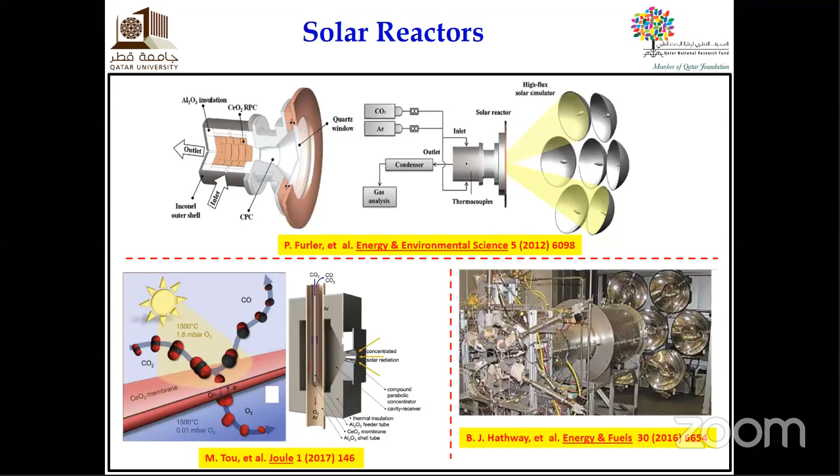So we are working on this, collaborating with different institutions. What we are doing is the material aspect, done by us. We are trying to find out the best possible materials. The other group has expertise in reactor design, mechanical engineering people are there. So they combine chemical engineering aspect, material aspect, and heat transfer, mass transfer aspect with us, and we are trying to develop the best possible reactor arrangement.

So basically what we did, on the right hand side, if you check this cylindrical thing, this is a solar reactor. The capacity is 100 kilowatt, meaning that much amount of solar energy, that amount of heat, it can take. The reactor is heated by using the actual solar energy.

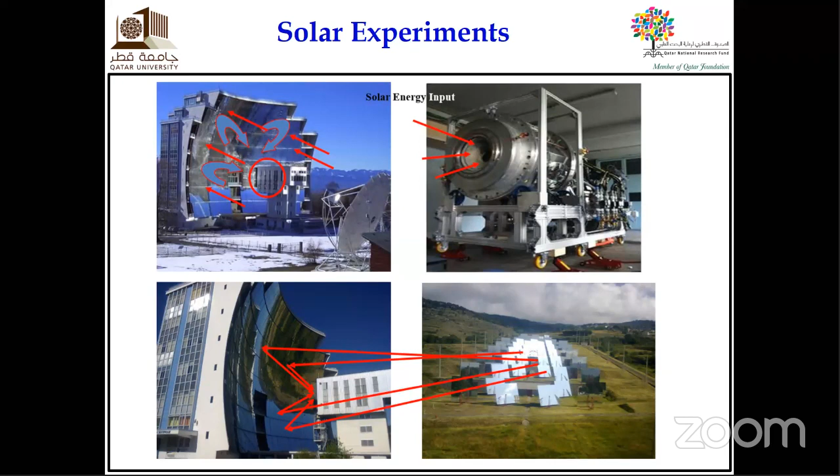Similarly, this was done for zinc oxide, and we are trying to do it for ceria and ferrites. We are collaborating - this slide will help you understand what we are doing. We are collaborating with India, with USA (3 universities), with Canada, with Switzerland, and other potential candidates who can do the solar experiments, the solar reactor design, and all these things.

So basically, this is what I have. Maybe my presentation was short, but I don't want to bore you guys. I just wanted to give what is important, what is easy for you to understand. So thank you very much again to the MGM Department of Chemical Engineering, for the faculties to invite me.